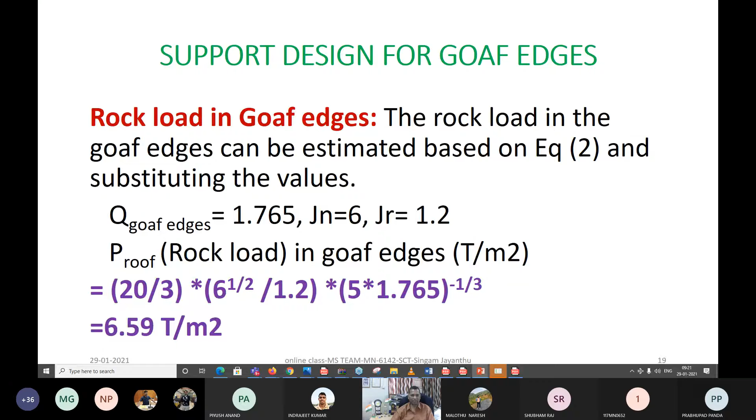Now, when it is decided that the support load is 6.59 ton per meter square at the goaf edges, the support resistance can be provided in many ways. As we have seen and I used to discuss with you, the most conventional or traditional way was to provide the support system with only skin to skin chocks.

That means suppose you consider this as your total goaf edge, that is a gallery. A goaf edge is nothing but a split, slice, or original gallery towards the goaf. This is a goaf, that's the reason why I kept coming back so that you can see. So if the back side is a goaf, and this is a gallery of 4.2 meter width, then I can have 3 or 4 chocks of 1.2 meter length.

That means your chock pieces are there. That is about 1.2 meters in length. And then when you keep 3 or 4 of those skin to skin, you can make it in such a way at your goaf edge that no person can enter inside that gallery, I mean the opening towards the goaf. On the back side of me is the goaf.

So there is a beauty of designing the goaf edge supports even in the olden days, and nowadays we are having a different philosophy, a different scientific way of thinking based on so many improvements, even in the type of supports. I will also be showing you what tests we conducted long back, maybe 3-4 decades back, in our CMRS at that time: what type of supports, how much capacity they will have, because we used to test ourselves along with Dr. N.M. Raju, Dr. Venkateshwarlu, Dr. U.K. Singh. These are the people who were there in the roof control department.

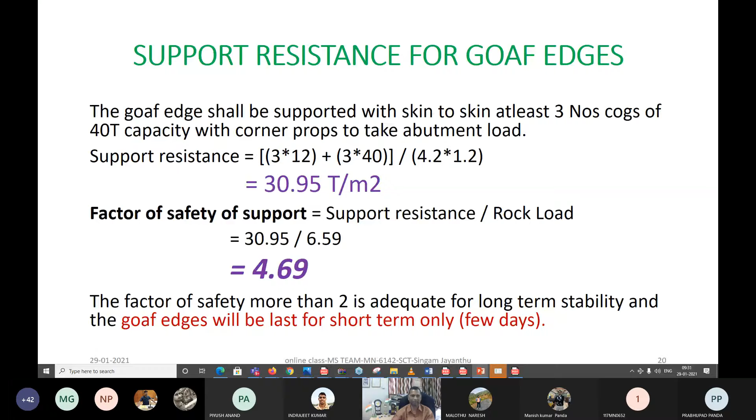Then here comes, as a part of this example, the case study we are discussing. Here the Q value is around 7 for the splits, around 3.5 for the slices, and around 1.7 for the goaf edges. Then the rock load is based on those equations you have seen; all of them are empirical equations only, let me tell you again, my beloved students. Then the support resistance here is 7, around 9 for the slices, and around 30 for the goaf edges.

And then the factor of safety with the designs, that means with the support system that is traditionally followed or available at the mine site, shows there is scope for improving, even reducing, this support resistance, because we are happy with around 1.5. Then again, with that sense of happiness, you should not be complacent about whatever research or scientific studies were done before, either by us or by other countries' agencies like USBM, NIOSH, or CMRS, CMRI, CIMFR, or NIRM, whatever the centers, or CSIRO for that matter, or NGI.

Then we should not be complacent with that, but we have to generate our own database and then develop our own strata control technologies to suit our own geomining conditions in India, since we are talking about it. But we can also apply to other countries based on this experimentation, this data, these guidelines, these models, what we develop as our Make in India concept. Then definitely we will be giving to other countries also, as we have been utilizing the equations which were developed in other countries, my beloved students of strata control technology.

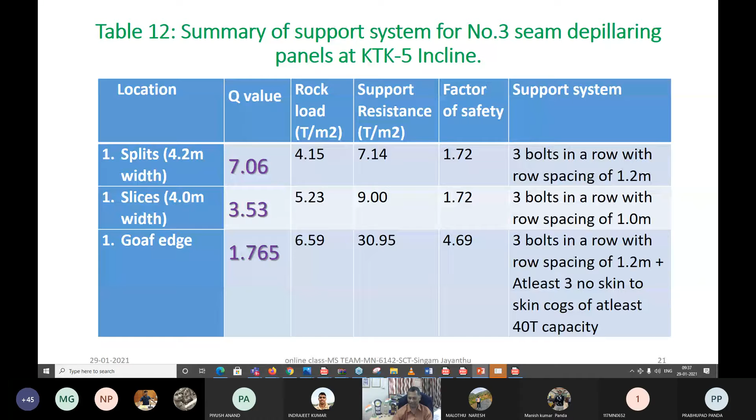So now you can see, my beloved students, this is not only the support designs restricted for our underground mines or excavations, since we are talking about the depillaring and development. There, if it is longwall mining, then you are supposed to consider so many other issues also, right? That we will discuss separately after discussing this development and depillaring.

Now, coming to other general design, as already we have discussed many times as a part of the initial stages of module 1, showing you the investigation what we have done. That is our Atmanirbhar Bharat concept, right? What investigation we have done is not taken from anywhere, from a website or something else, right? That is our investigation, our startups, our own experimental trials based on our indigenous trials. That's what our National Education Policy 2020 is, my beloved students.

Meanwhile, I would like to encourage you to take up understanding the present problems of our mining industry and come up with some innovative and disruptive technologies as a part of our strata control technology, MN 6142, also as a part of your assignment topics. I wish that each and every paper you are preparing in international journal format will be usable, and already I felt very happy interacting with some of my beloved students on their topics and their progress. So definitely that is better than any international journal papers.

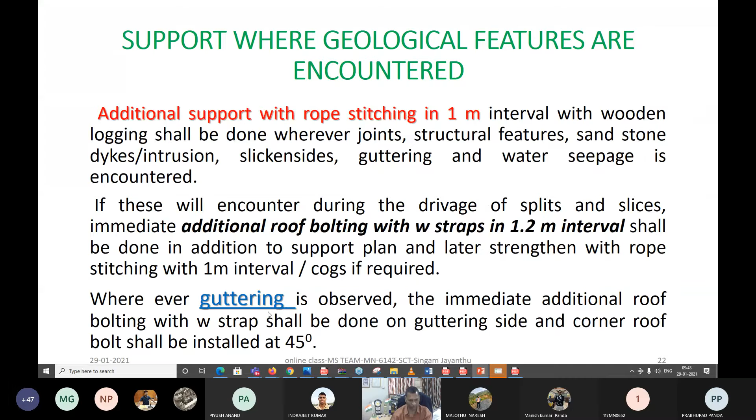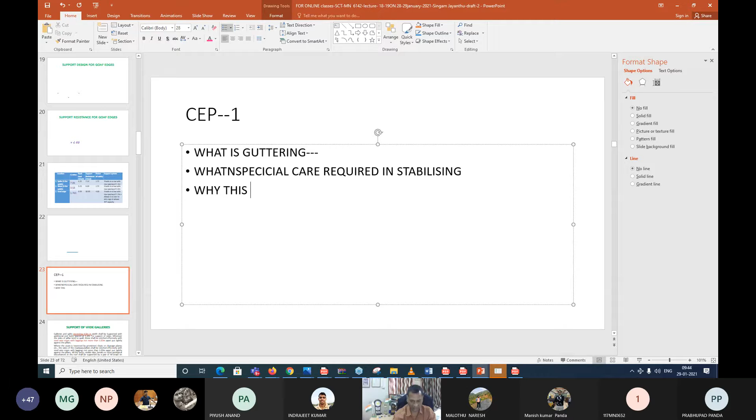At this instance, I would like to ask you a CEP question about this guttering we are discussing. Your CEP question is: give the meaning of guttering. What is guttering? We already discussed this. What special care is required in stabilizing it, and why does guttering happen? This is your CEP question for today.

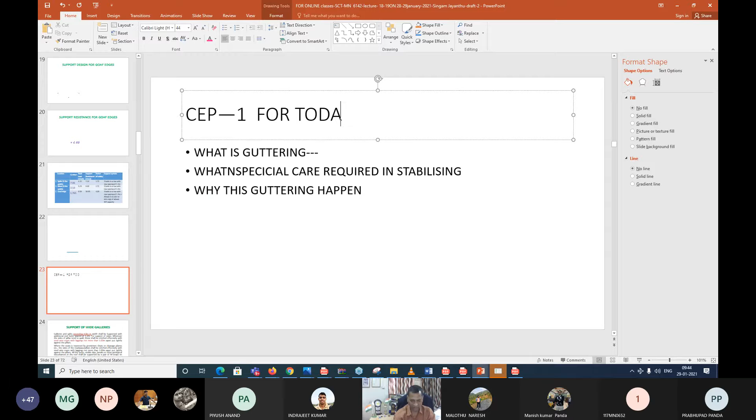Today it is what is today? Today it is 29 January 2021, my beloved students. So you should come up with this answer nicely. I know many of you already know about it. We discussed a little bit, and those who spend some time, definitely they will be having all this information with them. Bundle of information will be there with them.

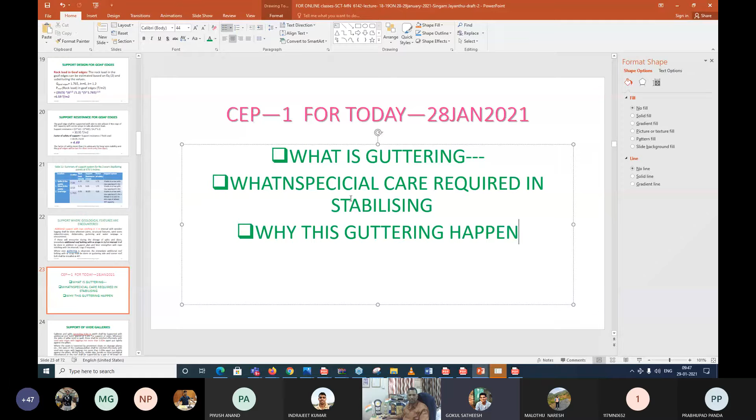Any other response? Because we discussed this before also. Any other response? Now I am going to this. At the end, you remind me as your doubt. If anybody is not responding, then we will continue further now.

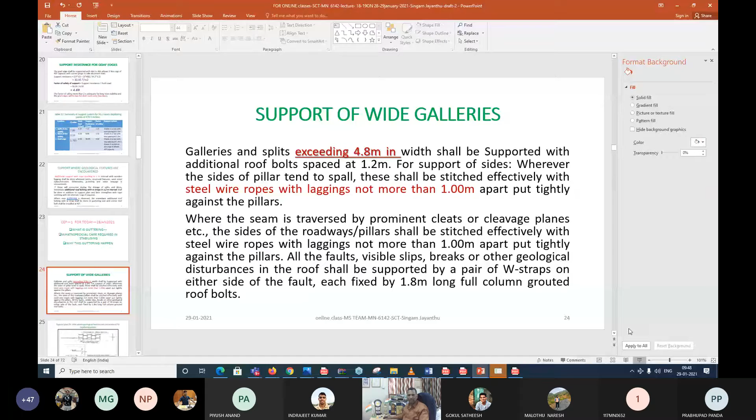My beloved students, it need not be even your development gallery or any place like splits and slices what we discussed just now. Sometimes these galleries are widened more than this 4.8 meter. If it is more than 4.8 meter, this is not allowed as per our regulation, our coal mines regulations, whether it is 1957 or recently modified 2017. So no gallery, especially a development gallery, is supposed to be more than 4.8 meter.

That was decided based on our experiences over so many decades. But now this need not be the case with our innovative support systems and innovative mechanization. It can be a continuous miner or something else, where we require more length of the supports, more maneuverability of the machine. When your machine is bigger and other persons also should move, it requires more space. So we ourselves want it more than 4.8 meter, and in those cases also you are supposed to design.

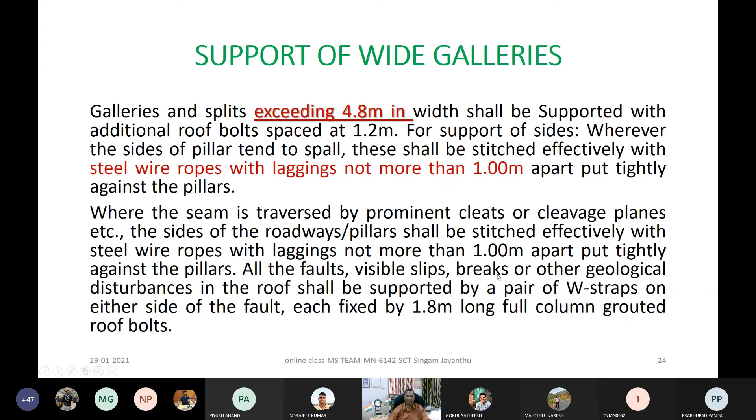Then sometimes for fault planes and other places which are visible, you'll be using even W straps and all. I will be showing you how it appears. Right now, I am showing this. This is a support plan where geological disturbances are encountered at the sides. It looks like this. This is a side view; you can see these are J bolts in between.

And then this is a rope, where it is like this, and a 19 millimeter diameter rope is being used. All these things you are supposed to mention as part of the quality of support materials also. This is a typical depillaring panel we are talking about. It can be in the development panel also, where sides are not safe, or if you observe that it requires additional stabilization and reinforcement measures, then you will be doing like this.

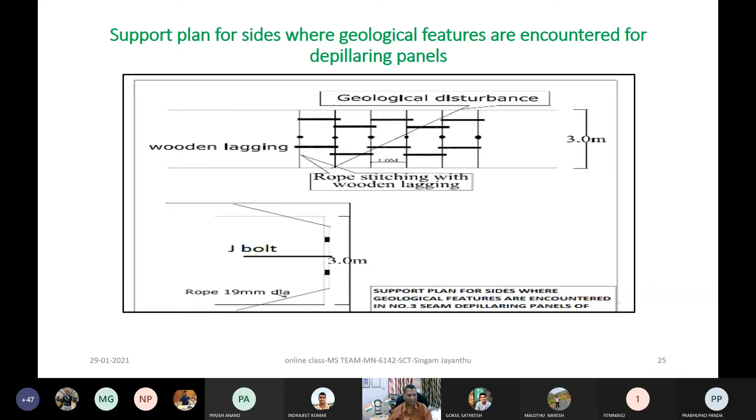And here, one more thing, please note down: where you are using cutting machines like continuous miners. This can be like this continuous miner. What are other cutting machines? That is a CEP question to you. Second question, since I am talking about continuous miners, I am putting one more, CEP question 2.

What coal cutting machines are used, and your understanding of them, because this was already discussed many times in previous courses, and the specific requirements of supports for that purpose. Since we are talking about support designs here, what are the specific requirements of supports when you are using cutting machines?

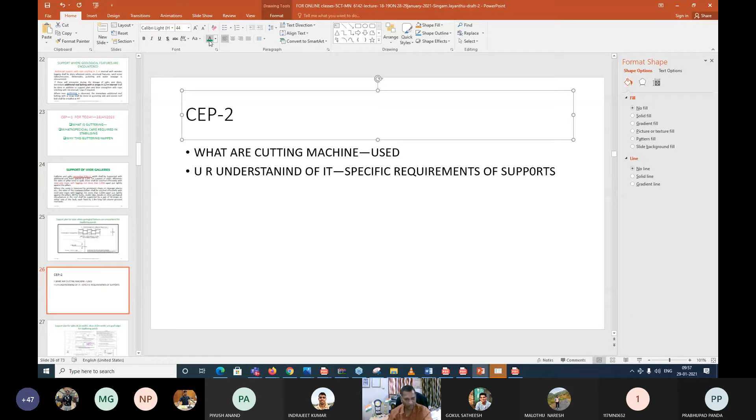This is our CEP question 2, my beloved students. Anyway, we are having 15 minutes more time, don't worry, right? 10 minutes time is there for you to think about it. Nothing much to think, already you know about it.

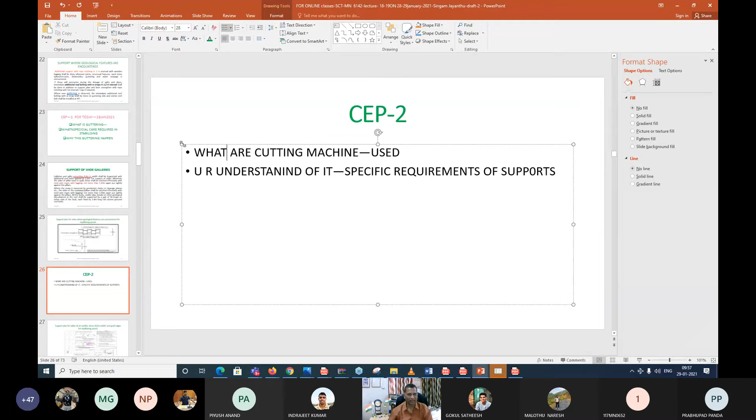As our wonderful students, my beloved students, you are sincerely reading so many things, and let me make it in a very beautiful pink color. I know you like pink color.

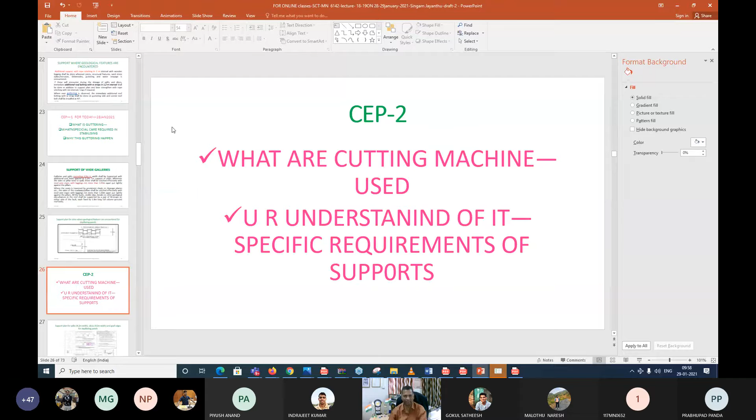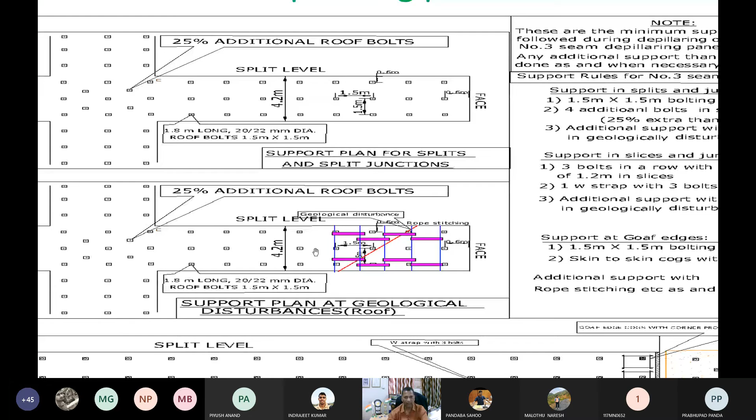Okay, no problem. Now, going further, my beloved students, you can see here how it is appearing for the supports. Now you see, setting and quality of supports is very important. I hope we tried to understand this in the beginning also. Let me tell you once more, refreshing yourself, where quality of support is very important.

And we have faced so many disasters, I should say, some accidents, when they say that for the sake of providing support or for the sake of fulfilling the requirements of our beloved Directorate General of Mines Safety and our beloved alma mater, right?

Our Mr. Prabhat will be with us again. I am reminding you so that you will be ready with some questions and interaction, so that you will be contributing to strata control technology as a student of strata control technology, and in ground control instrumentation as a student of that. You will be contributing to our Atmanirbhar Bharat, Make in India, Startup India. You can start so many things in innovation, disruptive technologies.

One part of that is truss support. Everybody, please note down: TRUSS, truss support. Why is it not implemented till now in India? This is very much required when you are going in depth, more than 600, 700, and of course other things we will be discussing. I tried to implement it as a scientist long back, 15-20 years back. There may be so many reasons why that project could not be taken up. But this is very much required for your future, my next generation mining engineers.

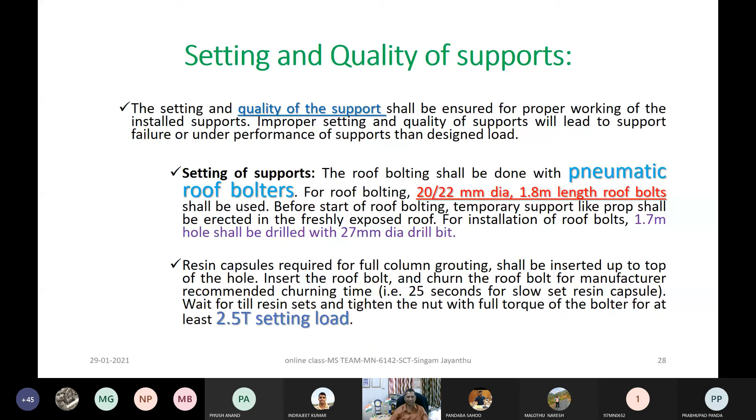So now a 2.5 ton setting load is ensured so that the efficacy of resistance by the resin bolt can be taken as an efficient way of providing support. That's why 2.5 ton is written here. And the bolts, resin bolts, timber bolts, wire ropes, these are all different requirements as part of the Directorate General of Mines Safety Circular I am showing you, of 3rd June 2010, a decade back, and there may be many modifications in between. This is a procedure even for manufacturers to get approval and testing done. Then this is Fe500 grade.

Our mechanical engineers know better. And resin capsules also have to be of quality, and they are supposed to be stored properly. Not only quality in manufacturing, but in storage is also very important. It is written here: stored at 25 degrees. It should not be kept in the hot sun at 40 degrees, right?

That is the meaning of this. Then timber should not have less than 15 centimeters, and I should not talk more than for 1 minute. This is showing 56, so that 3 minutes time for your CEP and other things. Then same thing for the wedges and ledges, whatever are shown here, it should not be less than 8 centimeters and length not less than 0.5 meter or 50 centimeters.

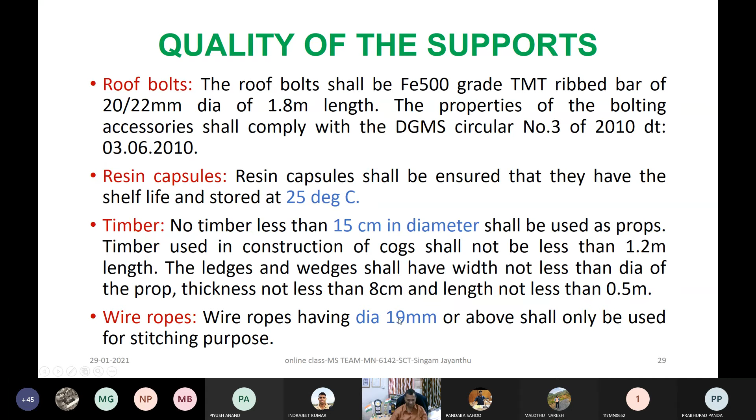Then wire ropes should not have less than 19 millimeters. There is a logic behind that, and those things we can discuss. But tomorrow we will be discussing again all the details of whatever tests were conducted long back by us at CMRI, right? And deciding the calculation, estimation of the support resistances, whether it is a roof bolt, roof stitching, how much support capacity you are supposed to take for 8 tons, 4 tons rope dowel, and steel prop 30 tons, and these details we will start tomorrow, our next class, my beloved students.

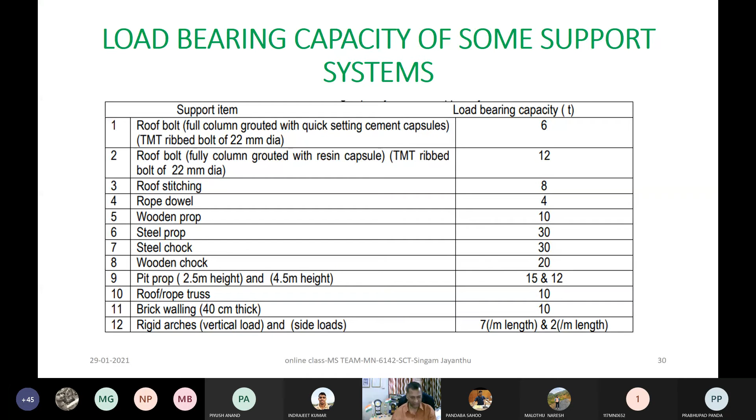This is 9:57. Now we are in time, 1 minute for each CEP question 1, 2, and also for your summary. Tomorrow I will be showing you along with this so many other details like your other support plans in typical galleries and other places, my beloved students, along with some more insight into the load bearing capacities which are required for you to design the supports and go further with your next designs, which also we will be discussing during 4 to 6 p.m.